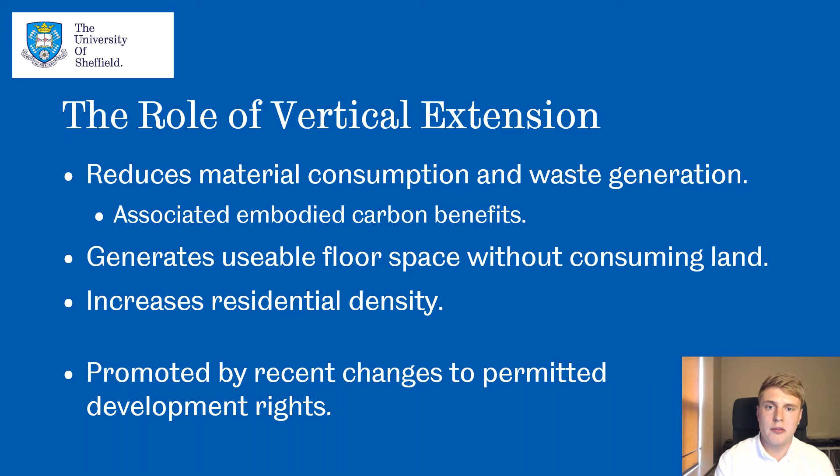Housing more people within the footprint of existing buildings also serves to increase the residential density of an area, providing additional environmental and socio-economic benefits. These benefits have been recognised by the government in an acknowledgement of the role that vertical extension has to play in future housing provision. This has meant that changes to planning laws have recently been made to allow for the delivery of accommodation through vertical extension without the requirement for a full planning application.

When considering which building archetypes may be particularly suitable for vertical extension at the outset of this work, it was quickly revealed from existing literature that multi-storey steel frame buildings are where focus should be placed initially. This is because they are relatively abundant, occupying an annual share of more than 40% of the non-residential multi-storey frame market for the last 35 years. Combined with the relative durability of steel in comparison with alternatives such as concrete, this means that multi-storey steel frame structures make up a significant portion of the UK's current building stock.

The inherent durability of steel also means that the design life of existing steel frame buildings may be easily justified beyond its initial intended duration. On top of this, steel buildings also tend to be more easily adapted than concrete or masonry alternatives, making structural remediation and strengthening easier where it is required.

We also know from existing work that steel frame buildings are likely to possess reserve structural capacity that may be utilised in a vertical extension, with one study revealing that the columns in 23 case study buildings were utilised by less than 50% on average. It should also be noted here that steel has a role to play in the construction of rooftop extensions themselves, with cold-formed steel structures often being used to provide a lightweight and relatively low embodied carbon solution.

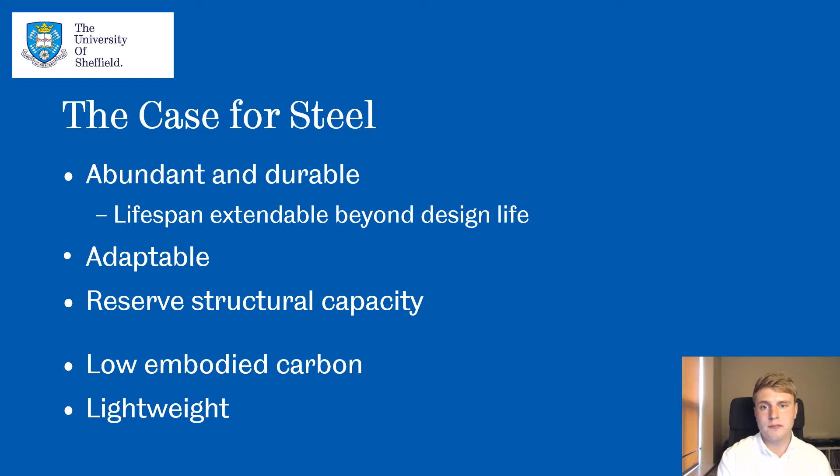Logically, the potential success of housing provision through vertical extension depends somewhat on the presence of reserve capacity within existing buildings. The issue here is that, although the sources of reserve capacity are well documented, the amount contributed by each has rarely been investigated. The aforementioned study by Moynihan and Allwood suggested that rationalisation was the major cause of this, resulting in a small number of section sizes being used in different loading cases for ease of procurement and construction.

The limited number of section sizes available for selection also worsens the effect of this, and means that all steel elements are inherently over-designed by at least some margin. Advancements in steel production and improvements in the accuracy of design codes also mean that significant amounts of reserve capacity may be identified in slightly older steel frame structures, should they be reappraised using modern codes of practice or tested material strengths. The conservativity of assumed live loads in current design codes also means that there might be further reserve capacity in some structures, should these be revised in the future.

One example of this is the fact that the assumed loading for office buildings has remained at 2.5 kilonewtons per metre squared in Eurocodes, despite dramatic changes to how we use offices, meaning that actual experienced loads are found to be somewhere closer to 1.5 kilonewtons per metre squared. Some engineers also have a historic and continued preference to use analytic design methods. This means that reserve capacity may be found should existing buildings be reappraised using more modern or upgraded analyses.

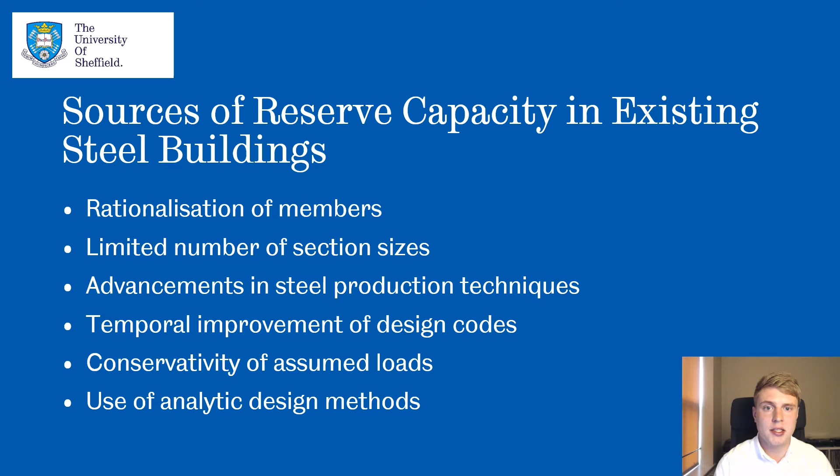It is a possibility for this that is investigated by this piece of work, which investigates the effect that considering column continuity has on the buckling capacity of multi-storey columns. Often, multi-storey columns are sized using the effective length method, which results in them being modelled as a series of individual pin-ended columns. As such, their effective length is taken as equal to the inter-storey height. This is evidently incorrect, however, with the column portions adjoining the critical section actually serving to add additional rotational restraint, as shown here. This decreases the column's effective length, therefore increasing its buckling capacity.

To overcome this, successive adaptations by Gantes and Mageirou in 2005 and Webber et al. in 2015 have resulted in a set of improved stiffness distribution factors. These are capable of more accurately estimating the buckling capacities of columns, with these being in close agreement with the values computed by finite element analyses. The work presented in the subsequent slides of this presentation uses these adaptations to investigate how much reserve buckling capacity is present in multi-storey steel-framed columns.

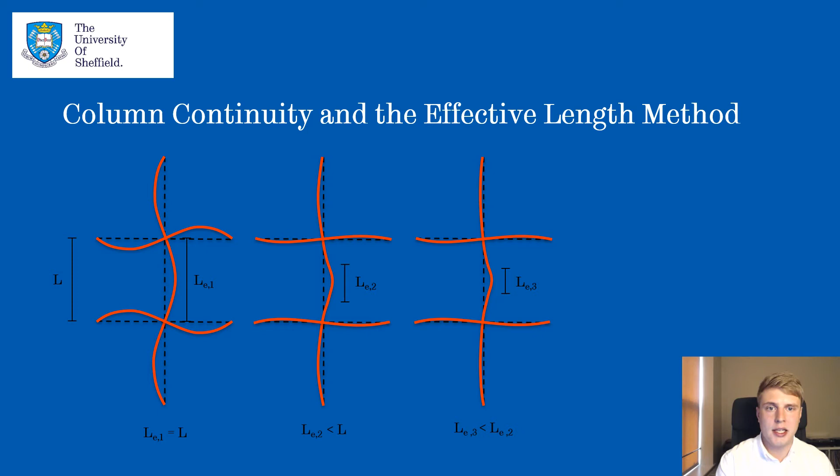To allow for this, a conceptual non-sway steel frame arrangement was adopted, whereby 3-storey continuous columns are loaded about both axes by nominally pinned beams. This removed the requirement to consider failure about the primary axis and meant that actual and nominal bending moments were not required to be considered.

The combined action effect of this frame was assumed to be 11 kilonewtons per metre squared at each floor level, with this value being generated assuming typical office construction and recommended imposed loading. Both column spacing S and storey height H were varied sequentially between limits reasonably expected to be found in office buildings. In this process, one parameter was varied whilst the other remained fixed.

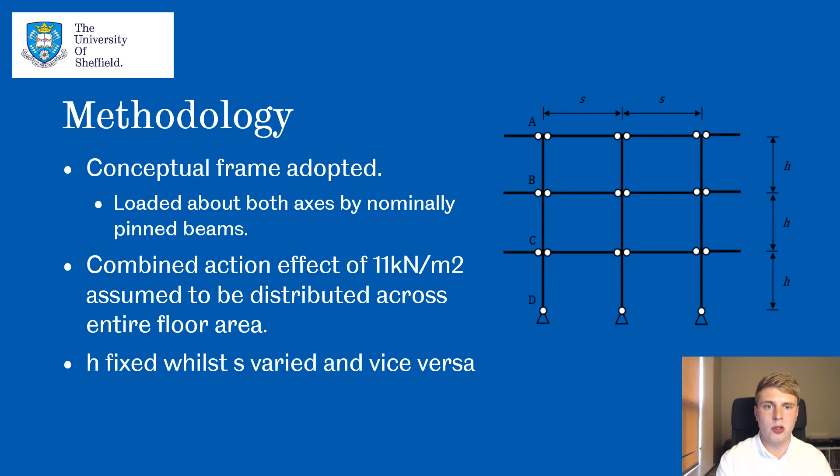For each structural grid configuration, the design force within the critical column section was determined using the assumed loading and attributed floor area. The lightest universal column section capable of resisting this load was then selected using the process outlined in Eurocodes to be representative of a typical design process. This was implemented in MATLAB for computational ease.

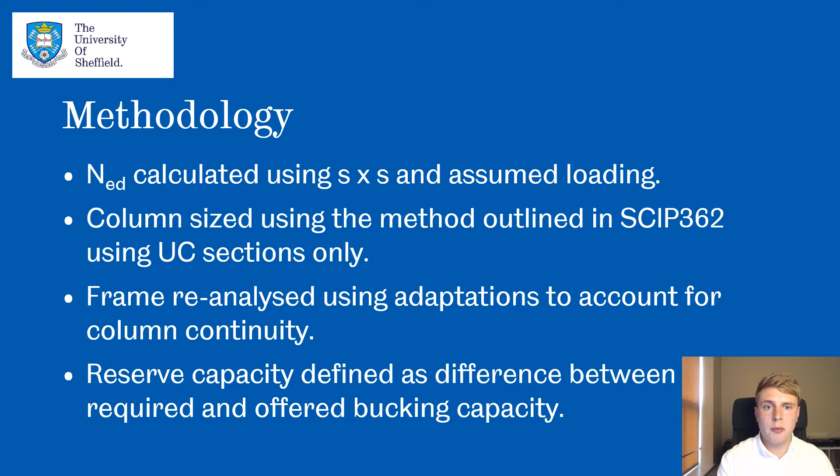The frame configuration employing this section was then reanalyzed using the effective length adaptations previously discussed to obtain its improved buckling capacity when considering the column's multi-storey continuity. By subtracting the buckling capacity required by the present design scenario from this value, the reserve capacity present within the column was identified. This was found to result both from the consideration of column continuity, but also because of the limited number of UC section sizes that were available for selection.

Rather than being a function of the present design scenario, this is instead more likely to result from the reporting of reserve capacity in a per metre squared unit. This is because, as column spacing increases, so does the area over which the reserve capacity is distributed. This in turn results in the uniformly distributed capacity decreasing despite absolute buckling capacities being much more consistent.

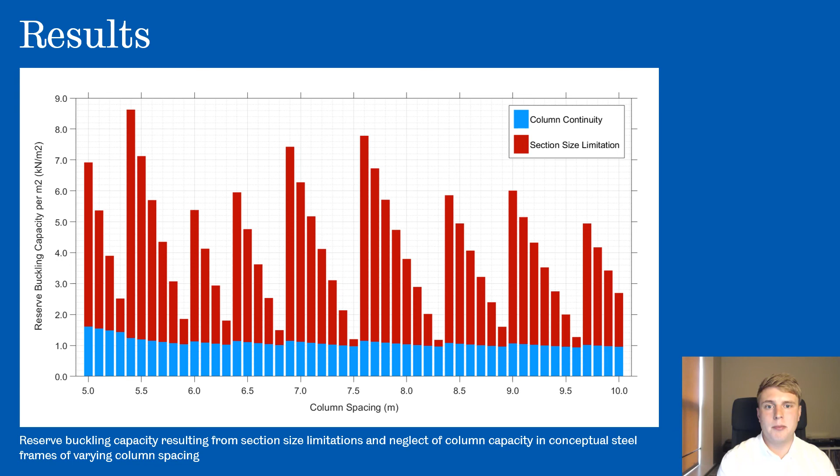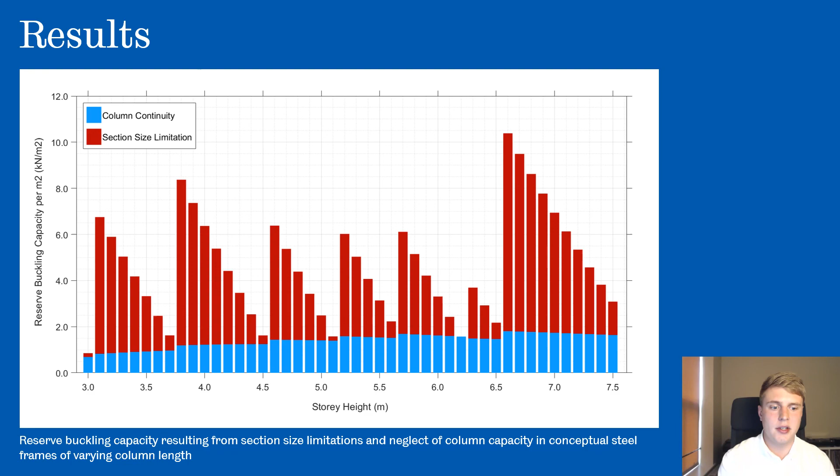This work has assisted in confirming the notion that steel frame buildings are likely to be particularly suitable for vertical extension. This is by acting as an initial pilot project to test the process of identifying reserve capacity through the reanalysis of structures using more rigorous methodologies than was employed in their design. Through the adoption of conceptual frame configurations, this work also reveals that considering column continuity alone does not identify sufficient reserve capacity to allow for vertical extension.

Despite this, however, it does contribute a fairly consistent capacity of over 1 kilonewton per metre squared for the frame configurations that were considered. It is therefore likely that when combined with capacity from additional sources or structural remediation, a large portion of the UK's existing steel frame building stock will be readily extendable. One of these sources is revealed to be the limited number of section sizes available for selection, something which also worsens as rationalisation is carried out by design engineers.

Despite serving as an initial feasibility study, this work is highly conceptual in nature and only considers the buckling capacity of a limited number of frame configurations. Further work is therefore required to identify the total reserve capacity in real-world structures, considering all different possible failure modes.